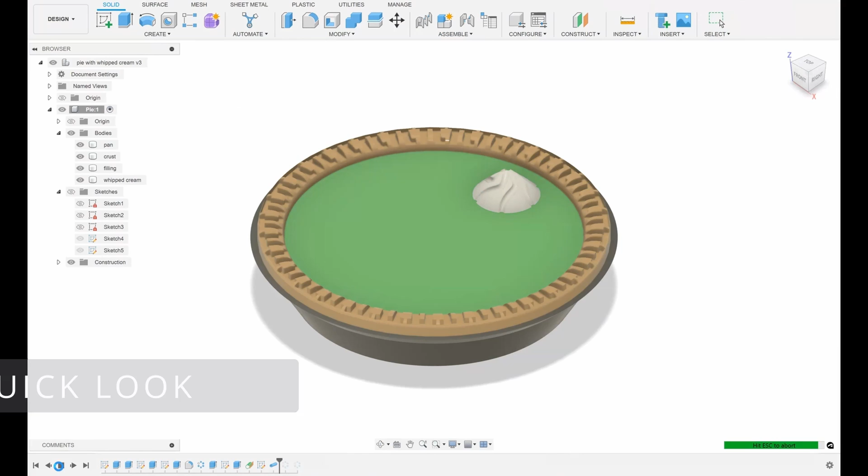In this video, I'll show you the steps I use to create a 3D model of a pie in Autodesk Fusion. First, we'll create a component and start a sketch with a circle for the widest part of the pie.

We'll set this to 50 millimeters. Then we'll select the area to extrude for the lip of the pie pan. Use the keyboard shortcut E for extrude and extrude it for a distance of 2 at a taper angle of 45 degrees. And that's the top portion of the pie pan.

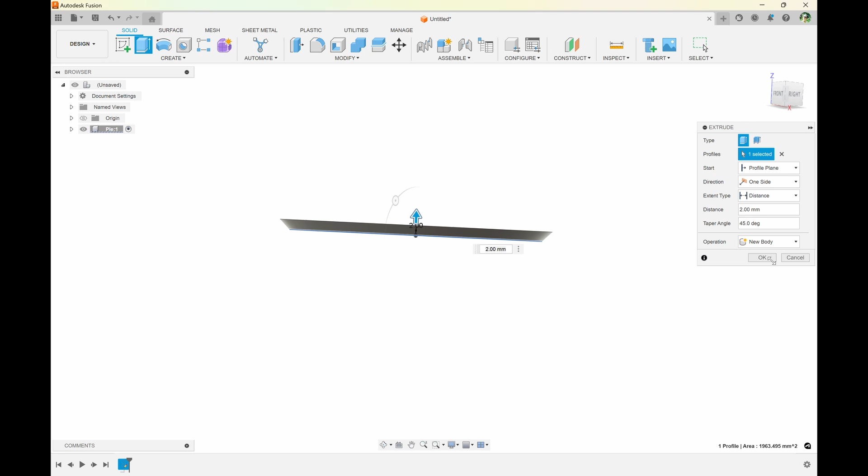Now we'll create the bottom portion by selecting this face and extruding it downwards by 7 millimeters. I'll need to use negative here to extrude it to the right side, and set the taper angle to -30 for this nice shape. And now we have a pie pan.

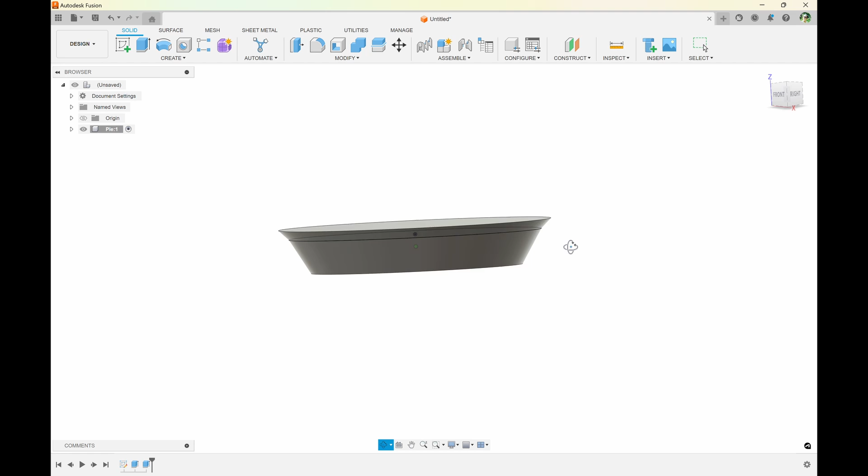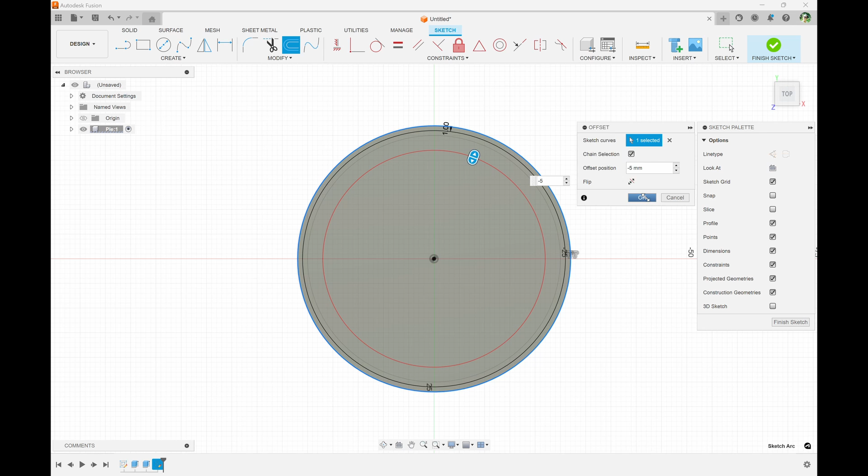Next step, let's create the pie crust. We'll create the sketch on the top of the pie pan and offset the outer edge by -1 millimeter for the outer part of the crust. Then we'll offset that same edge again, this time by -5 millimeters to create the inner part of the crust. Now select the ring of crust and extrude it by 2.4 millimeters. Now we have the basic shape of the pie crust.

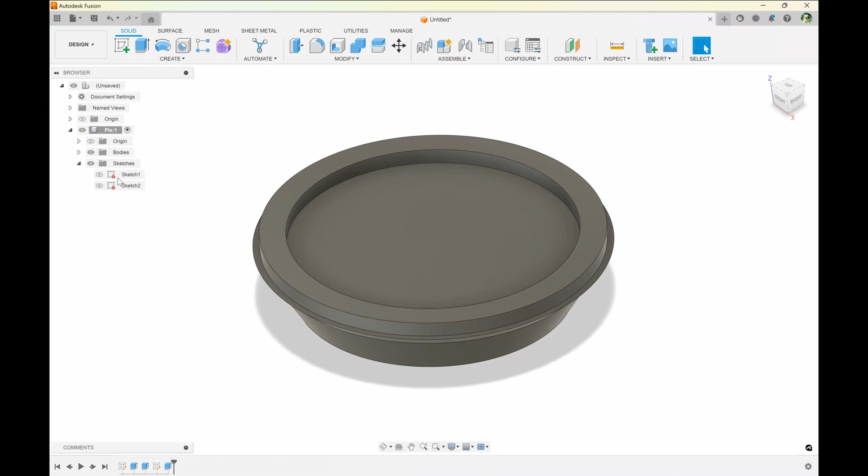Let's pause on the modeling and do a little housekeeping. Let's turn off the sketches so we can see this more clearly, it's not as cluttered. And don't forget to rename your bodies so it's easier to see what's what. It'll come in handy later, and it's just good practice. So here I've labeled one body as pan and the other as crust.

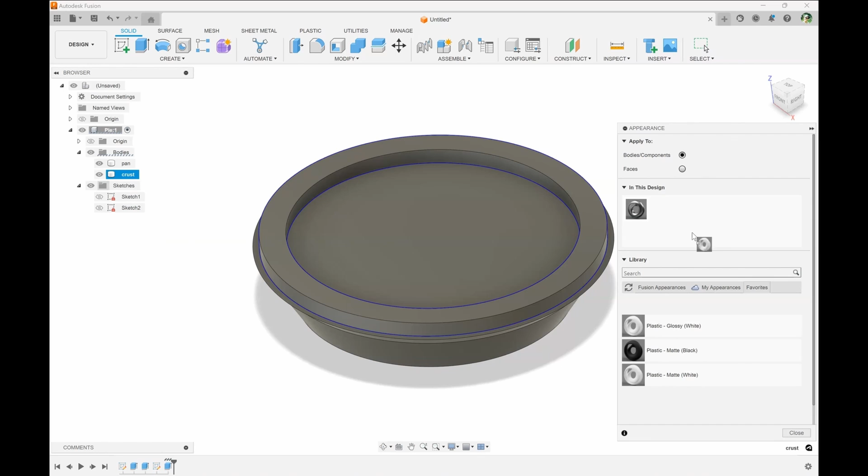Let's go ahead and make the pan a silvery color. You can get to this by right-clicking on the body and going to Appearance. Let's choose a nice tan color for the pie crust, and just drag and drop it to the name of the body to apply it. Let's duplicate this tan color and change it to green for the pie filling later on.

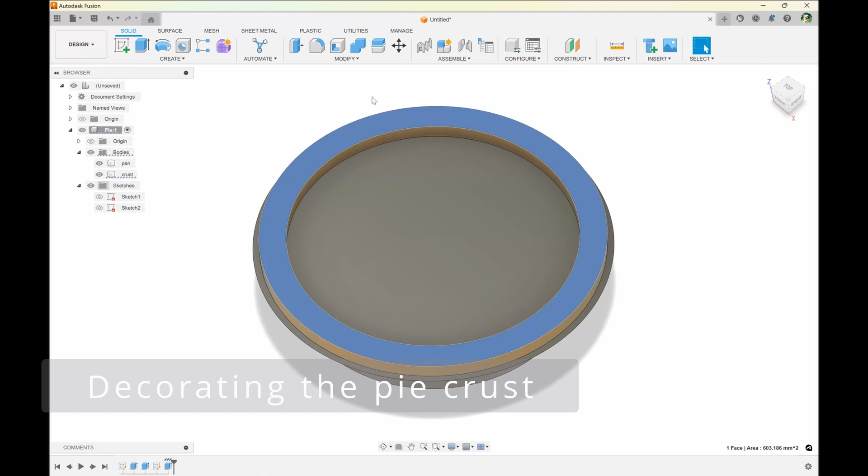Now that we've got that taken care of, let's close out of this and get back to modeling. To decorate the pie crust, let's create a sketch on the top of the pie crust and add text to the inner edge of the pie crust.

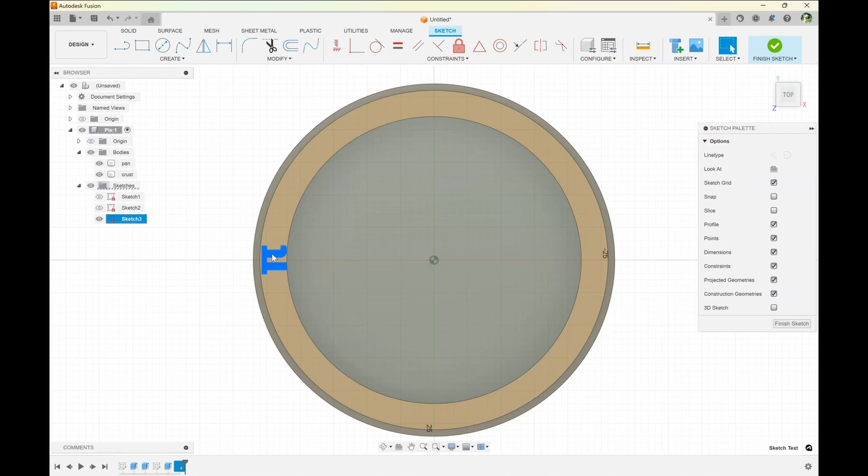Type in the pi symbol by either going to Special Characters keyboard, or you can Google it and copy paste it there. I'm using Roboto black font at a height of 5 millimeters and placing the text above the path. Now that we have our pi symbol, I'm going to extrude it to cut into the pie crust.

I'm selecting -1 millimeters for extrusion. I'll turn off the sketch so you can see how it looks now. To make the pie crust look less boxy, I'm going to add a 2 millimeter fillet on the inner edge and a 1 millimeter fillet on the outer edge. And here's what it looks like.

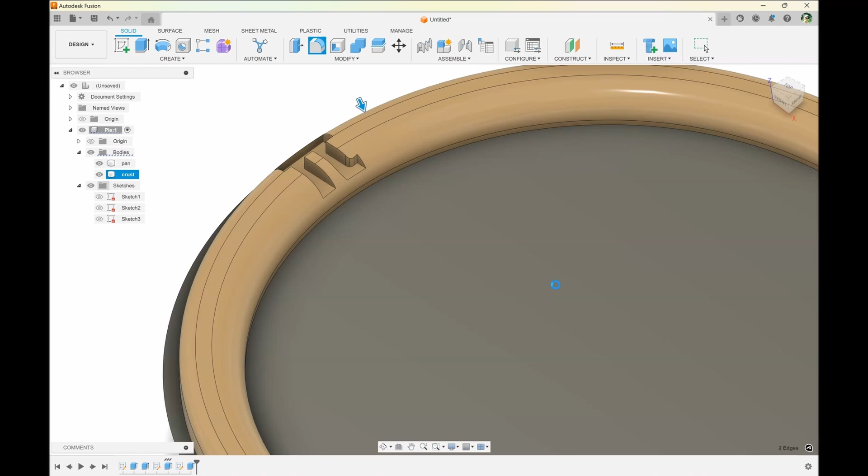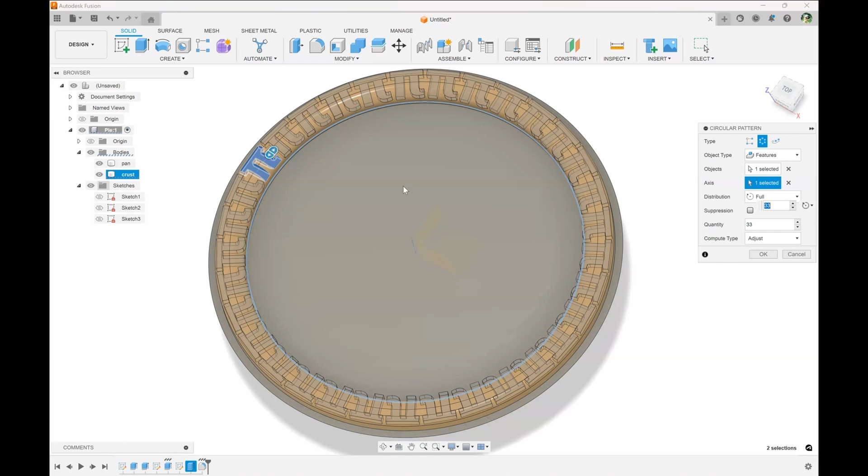To create pi symbols all the way around the pie crust, I'll use Create Pattern, Circular Pattern, and Features as the object type. I'll select the Extrude feature in the timeline and one of the edges of the crust as the axis, and set it to have 33 pi symbols around. Press OK to complete the pattern.

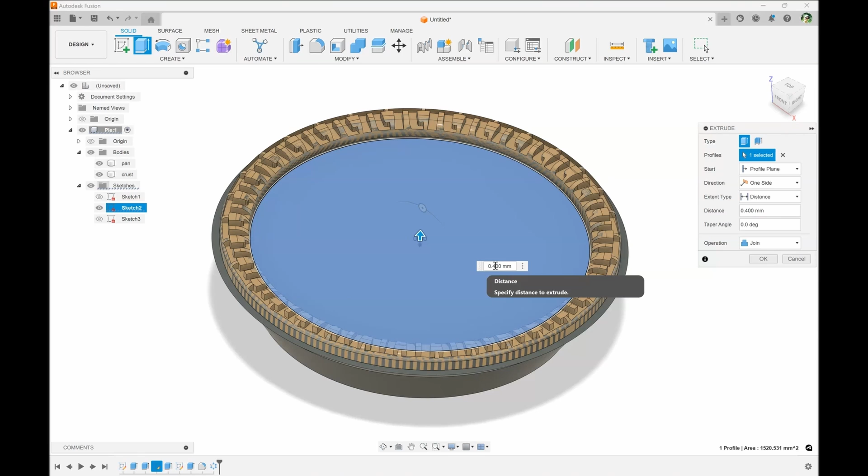This will be just 2 layers of filament with my 0.2 millimeters layer height. Select new body so I can color that separately, and make sure to rename the body to filling. Right click on it to go to Appearance and find that green color and drag and drop that to apply.

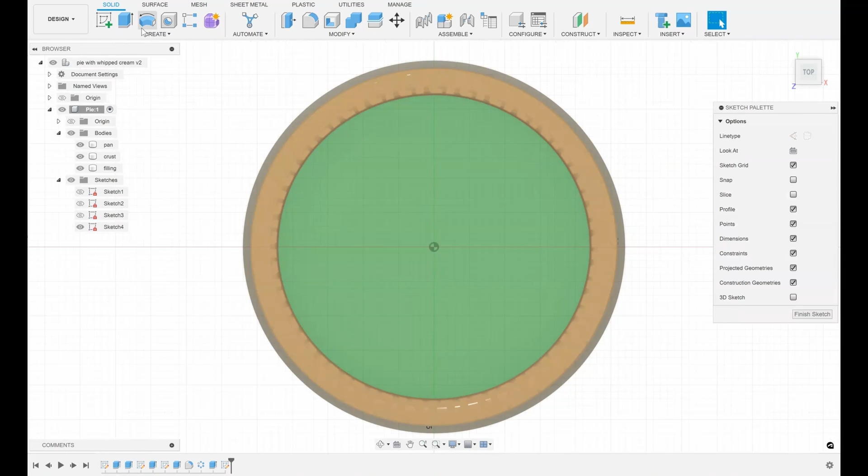Now it's time to make the whipped cream. First we'll create a sketch on the pie filling and create the circle for about a 10 millimeter base of whipped cream. I'll extrude that up by 5 millimeters at a taper angle of -45.

We'll create that as a new body. And of course, rename that to whipped cream and set the color to a nice white. We'll just drag and drop that there.

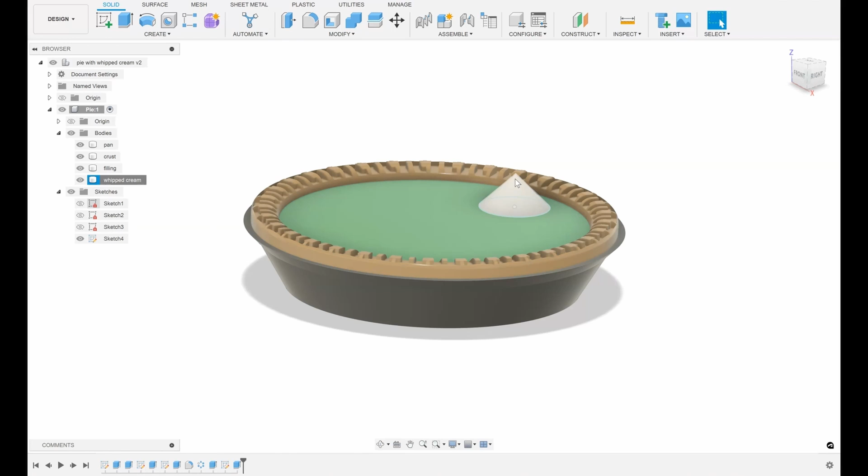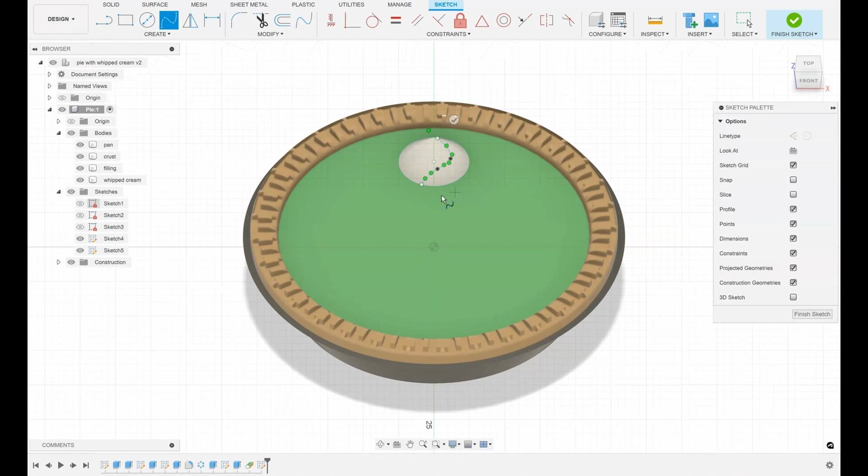To make it look more like a dollop of whipped cream, I'm going to construct a tangent plane and select the whipped cream for where I want the tangent plane to be, then hit OK to create it. Then creating a sketch on that plane and doing a fit point spline to create roughly where I want that swirl to be. I'll need to adjust some of these points to make it fit more along the whipped cream.

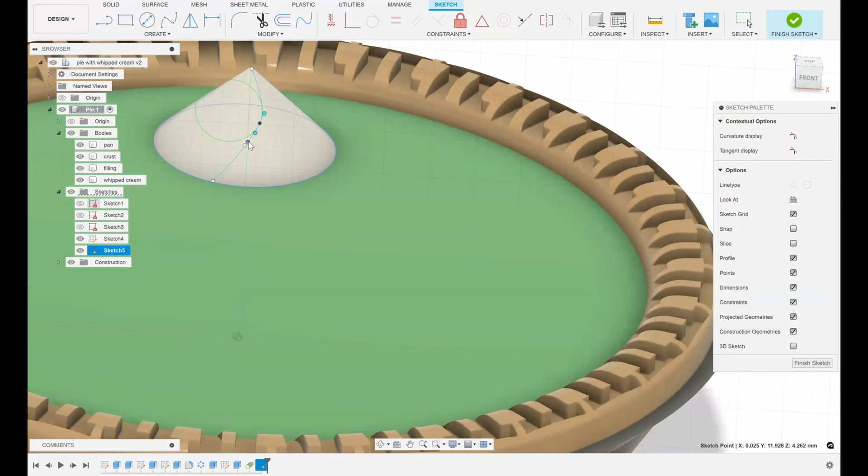Okay, that's pretty good. Now to create a pipe that follows along that path that I created. I'll set this to a section size of 1 millimeter and make sure the operation is cut and that it only cuts through the whipped cream. And press OK.

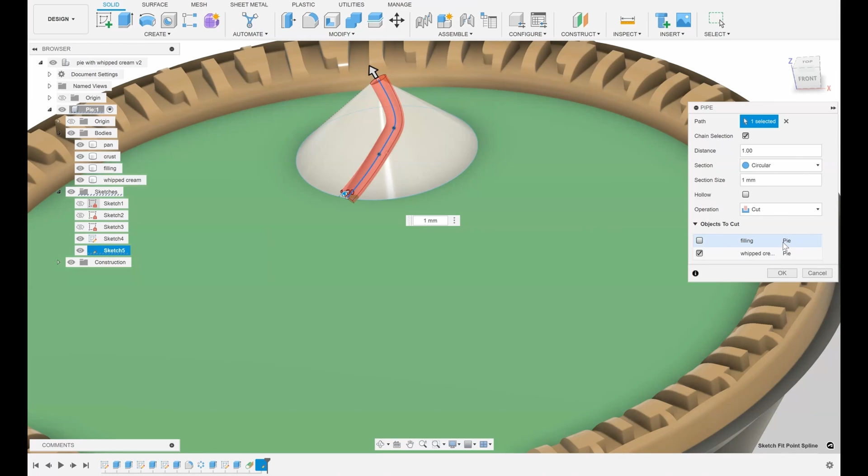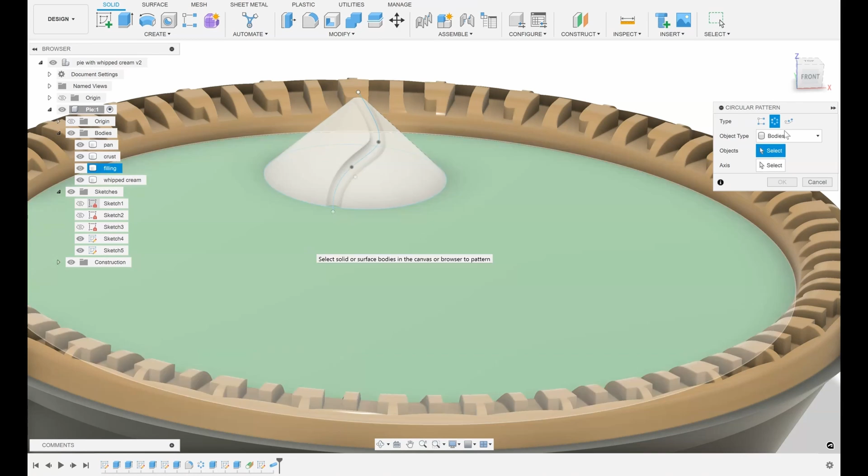Then make some minor adjustments so it fits better and looks better now that I can preview it. Now I'll want that same cutout around the other sides of the whipped cream, so I'll use pattern - go to Create, Pattern, Circular Pattern, and select features. I'll select the pipe feature from the timeline and set it to a quantity of 6. And now I have a whipped cream.

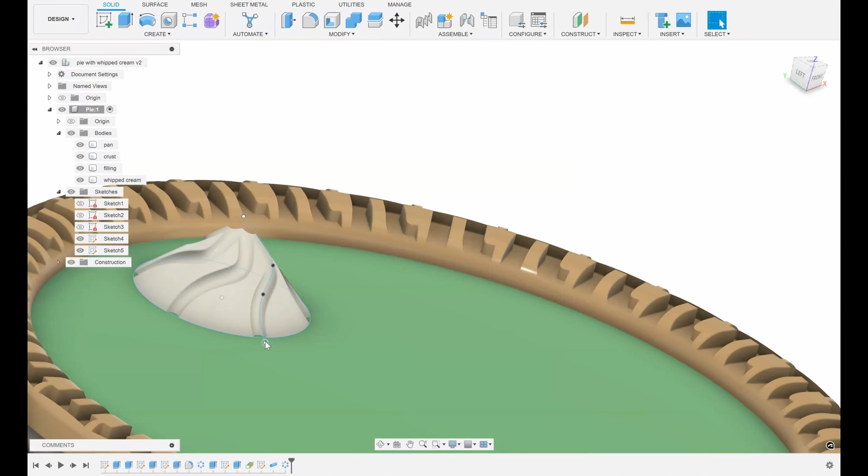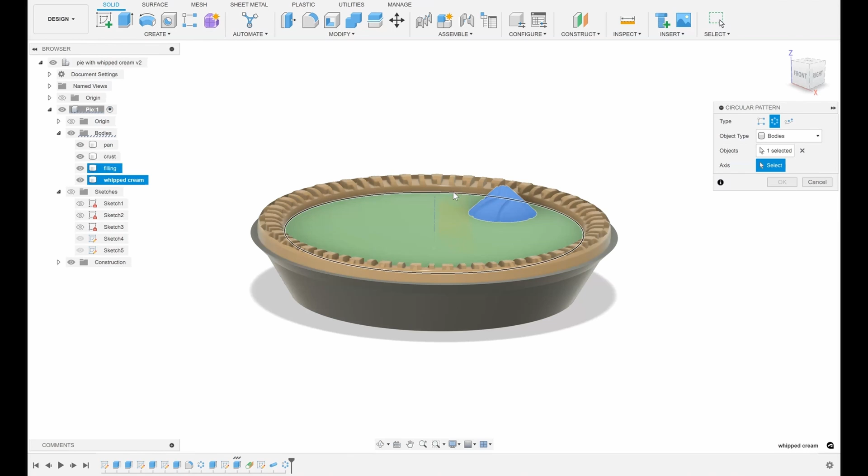Next, I'll want to create whipped cream pieces all around the pie. So I'll also use the circular pattern - go up to Create, Pattern, Circular Pattern, and select the body this time, select the whipped cream piece, the axis of the crust, and a quantity of 6. And that's the completed pie.